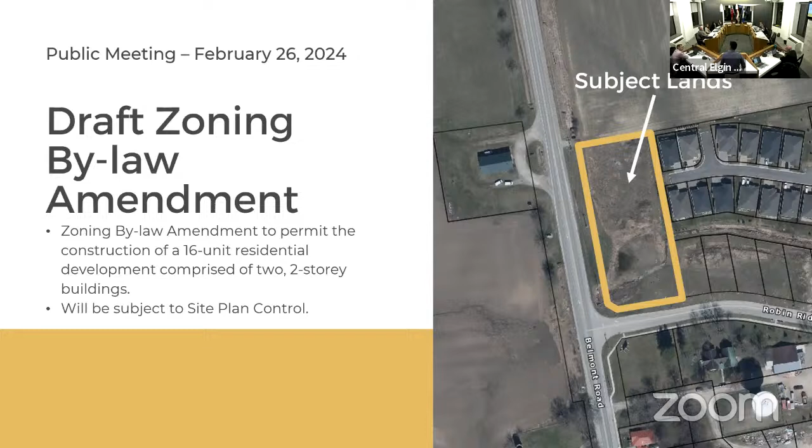And just for council's reference, the applicant and some members of the public are in attendance today to speak to or ask questions.

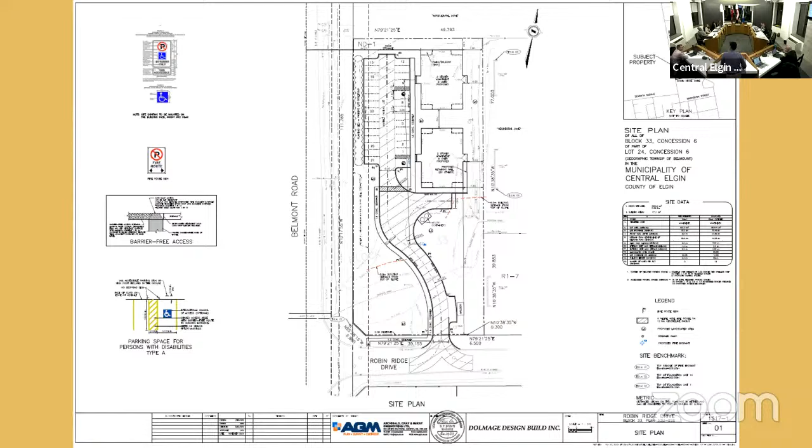So just for the purposes of people in attendance and online, the proposed amendment would be supporting this draft site plan that was submitted with the application. As you can see, a driveway and parking area coming off of Robin Ridge Drive with two-story, 8-unit residential dwellings, apartments in the northeast corner of the property. Again, this is a preliminary site plan subject to change, but it gives a general idea of what's being proposed.

The first part of the amendment itself is the repealing of bylaw 1625. Back in 2013, a zoning bylaw amendment was approved for this property to permit a church. This would repeal that and move forward with a residential zone consistent with the designation on the property.

Part two of the amendment would then introduce Schedule to the bylaw, being Schedule 1, and designate the area on that schedule in heavy solid lines as RM1-4, with that schedule being B6. As noted on the screen, that's the site-specific schedule.

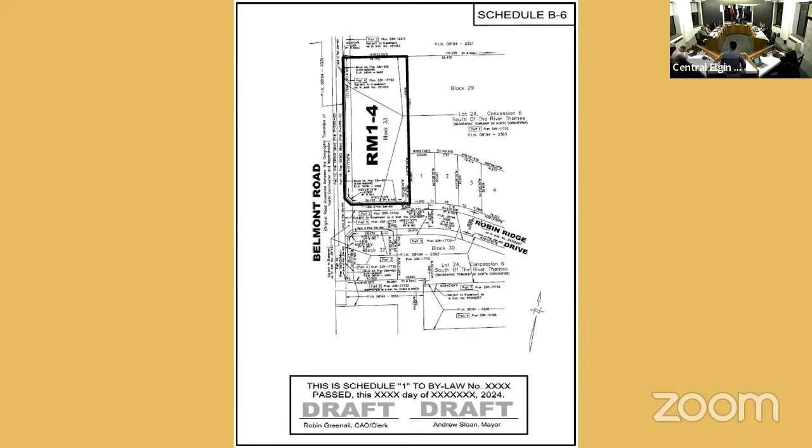The third part of the amendment would introduce a new special zone to the multiple residential section of the bylaw, outlining that the area affected by this zone is RM1-4 on Schedule B6, providing that the minimum lot area is 5,800 square meters, minimum lot frontage is 50 meters, minimum front yard setback being 55 meters, side yard setback being 6 meters from the interior side yard and 23 meters from the exterior side yard.

The County of Elgin does have a specific setback from the center line of Belmont Road, so to respect that, it's 26 meters. Maximum building height provided as 9 meters, rear yard being 4.5 meters. And when we're looking at rear yard, it's the northerly lot line, just for purposes of the amendment.

Maximum coverage being 20%. The site plan itself allows for roughly 13 to 14% coverage. The additional coverage requirement here would be to account for any amenity areas or structures that may be requested through the site plan process.

Maximum number of dwelling units being 16 per lot as per the request. Parking spaces being 20, and then exceptions to the general provisions of that zone to allow for what's being proposed through this amendment. In anticipation of eventual consolidation of the bylaw, Schedule 2 is introduced, being Schedule B, which includes all the amendments that have occurred to date, including this one, which can be seen on the screen here. Thank you.

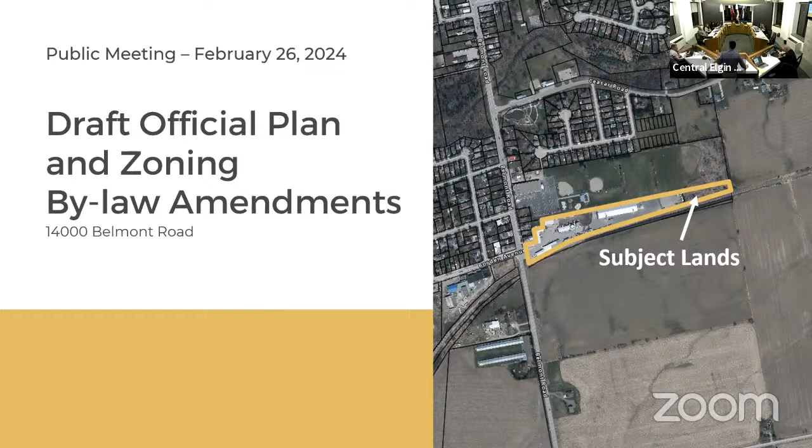On the screen, the area of the specific official plan amendment and zoning bylaw amendment is denoted where that arrow is, the back portion of the property. The purpose of the amendments is to permit the proposed construction of a 1,250 square meter warehouse for storing seed and fertilizer.

Of note, the lands used to be part of the municipality of Central Elgin, as part of their community facility for soccer fields. In 2018, the lands were divested and purchased by Belmont Farm Supply with the purpose of expanding their operations in the future.

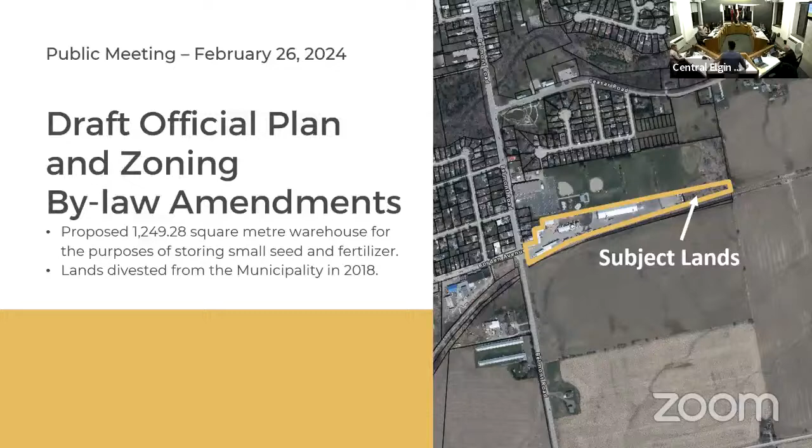This brings us to the draft official plan amendment. Since the lands used to be part of the community facility lands, and there was a woodlot on the property previously, the official plan amendment is required to change the existing community facility designation and natural heritage designation on the property to commercial industrial. This is the same designation that applies to the balance of the lands for Belmont Farm Supply to the west, so it's being consistent with what is already on the property and in the operation.

The amendment itself is purely a mapping amendment, introducing a new Schedule B, Community of Belmont Land Use Plan, and it's going to change the area shown in heavy solid lines from community facility and natural heritage to commercial industrial.

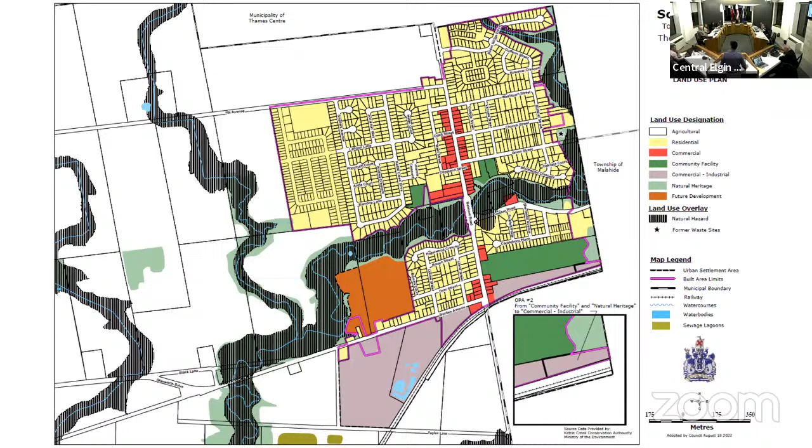As part of that amendment, the location plan again shows, it's hard to see here, but that back portion identified as the area of the amendment. Then there's an introduction of a new schedule to the official plan, again showing that change from community facility and natural heritage to commercial industrial.

Then to further facilitate the development, the property needs to be rezoned. Right now it's a combination of a park designation and natural heritage zone. The rezoning would create a new site-specific industrial M1 zone, which would be the same as the M1 zone that applies to the west of the property, applied for when they did that previous expansion, the large white building you can see on the screen right now.

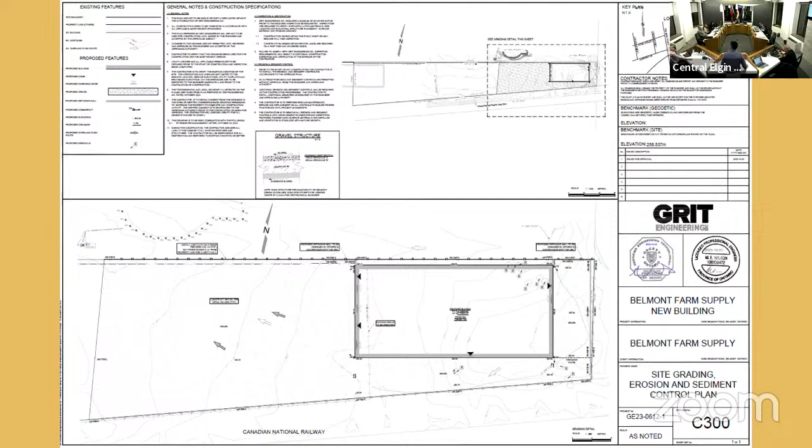As part of that, you can see the area on the map, the rectangular portion of the property is the area that was brought in through the purchase of the divested property from the municipality. That back portion is where the building itself would be located.

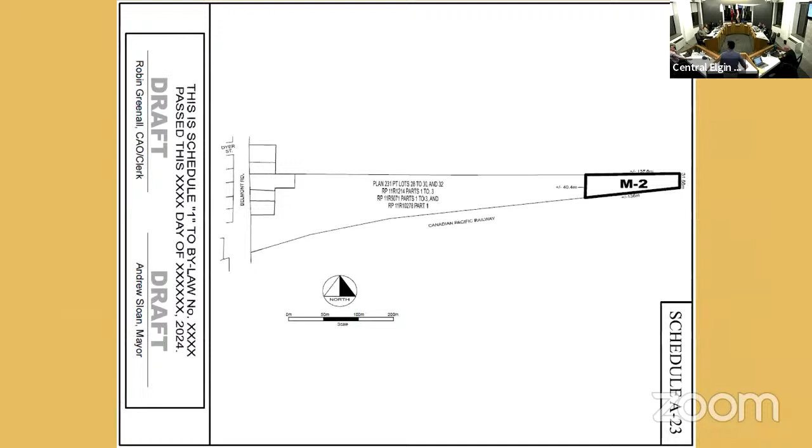Part one of the amendment introduces a new Schedule 1 to the bylaw, designating the area in heavy solid lines as M2, which can be seen on the screen. The second part introduces a new subsection to the commercial industrial section of the zone, being 7.2.6.2, identifying the area affected as M2, shown on Schedule A-23, and providing that the minimum side yard setback on the north side of the property is 1.5 meters.

And then, as we do, we're introducing a Schedule 2 to the bylaw, which provides a consolidated version of the bylaw that includes all amendments to date, including this one, shown here. My cursor is right around where the change on the amendment is.

Thank you. Mr. McClure, quick question - so we made this land surplus and sold it to Belmont Farm Supply, correct? How many years ago was that? Back in 2018, so 6 years ago, and they're now having the zoning changed to make it the same as the rest of their site? That is correct. Thanks.

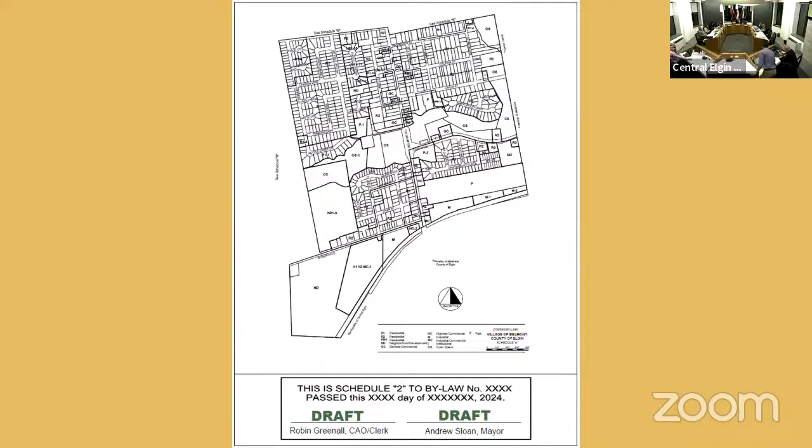Ms. Leach, have you received any written submissions on the proposal? Mr. Mayor, correspondence has been received from Carol Landon, Kevin Landon, and Linda Baker. Concerns include noise and dust pollution, lighting, and proximity to residential and recreational uses.

Thank you, Ms. Leach. Is there anyone in the gallery that wishes to speak to this? Is there anyone online that wishes to speak to it, Ms. Leach? I would ask that anyone online wishing to speak, please unmute. Thank you.

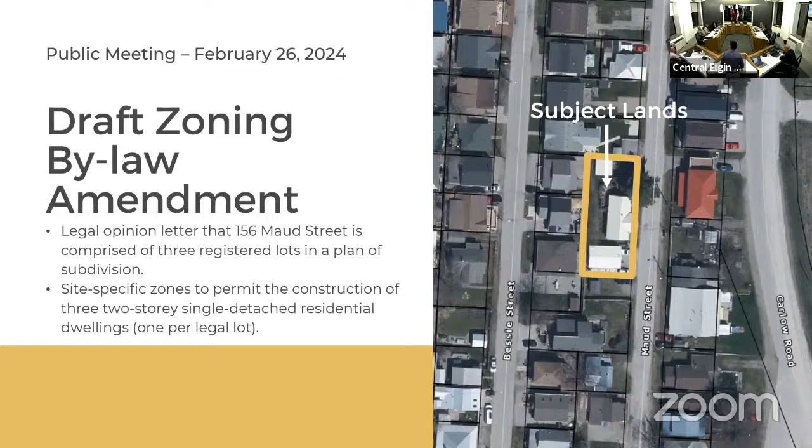So for the purposes of explaining how the amendments are proposed, the top residential dwelling is proposed to have a residential driveway on the north side of the property, with the middle lot having a driveway on the south, and the south property having a driveway on the north. I bring that to your attention, as all of the zoning regulations are more or less identical, other than one specifically that changes the north and south side yard setbacks in order to accommodate the parking on site and to reflect the geometry and location of the proposed buildings.

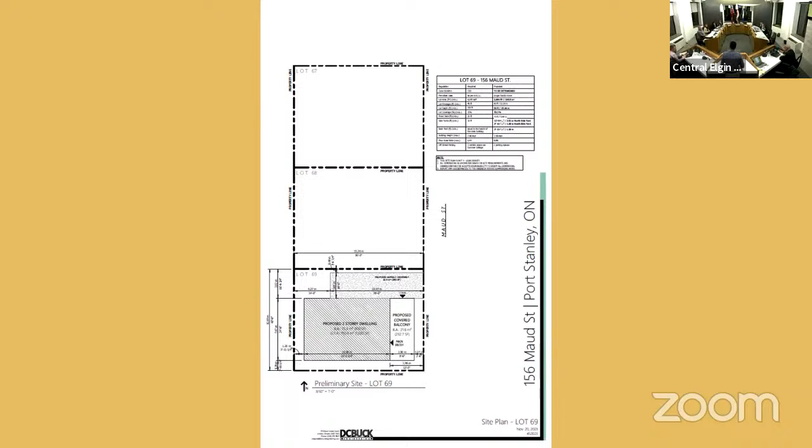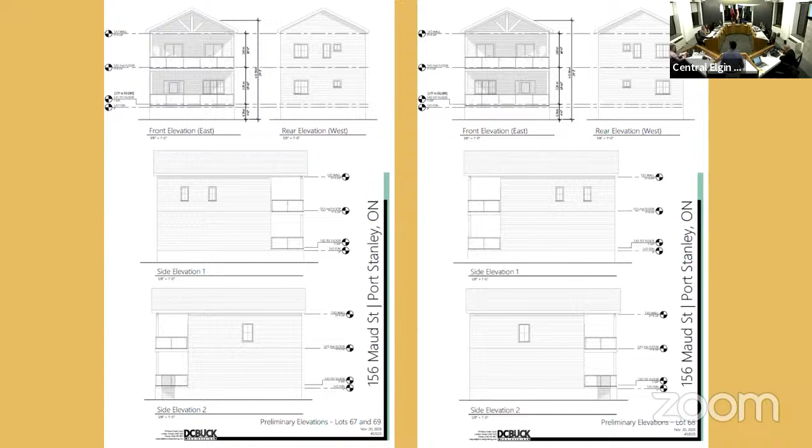And again, this is proposed at this time a plan for the buildings themselves. Again, showing that there's a front porch, an enclosed front porch at the front, which will come into the zoning amendment as well, with the main building wall pushed back from the property line.

So this brings us to the amendment itself, part one being Schedule A to the zoning bylaw and being map part 1CA. Part two of the amendment designates the area shown in heavy solid lines as R1-94. As you can see on the screen, the north and south lots are that R1-94, and there's a subsequent amendment for the center portion that will be R1-95.

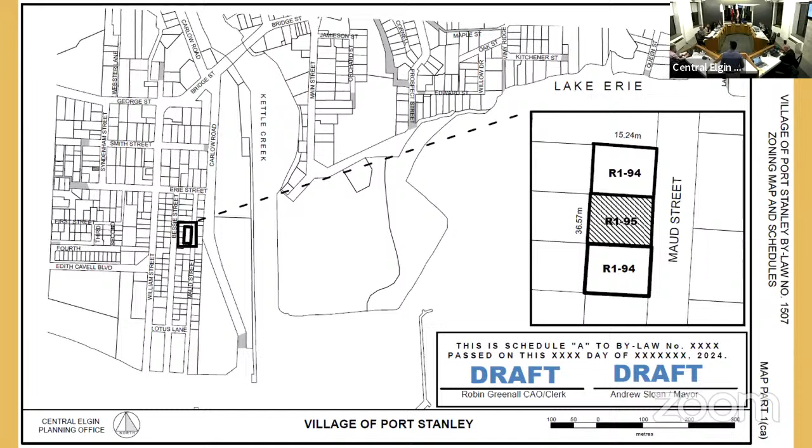This introduces a new subsection to the residential provisions of the bylaw, being that 9.2.2.94, defining that area shown in map part 1CA as R1-94, having a lot area of 185.8 square meters, lot depth 15.25, lot coverage 52.1, front yard setback of 3.96 meters to the main building wall, and then 1 meter for the unenclosed porch, again to ensure that it remains unenclosed.

So for sightline purposes for people coming in and out of the property from the driveway. Side yards, 3.52 meters on the northerly side, 1.2 meters from the southerly side, rear yard 1.2 meters, floor area ratio being 0.81, and then maximum off-street parking being 2 parking spaces.

Again, this was a major consideration through the amendment itself, given the substandard size of Maud and Bessie streets, it was to ensure that any redevelopment of the site could accommodate parking on the property itself and not further exacerbate parking concerns along Maud and Bessie. Then again, the exceptions to the zoning bylaw, given Maud and Bessie's historical nature, there's a lot of exceptions to the general provisions of the bylaw to allow what's provided.

For the amendment, again, it introduces, on the hatch lines you saw previously, that R1-95, and then introduces a new subsection after the previous one, defining that area as map part 1CA as R1-95. Again, same lot area, lot depth, lot coverage, and lot frontage, again ensuring that it's the main building wall that's set back, and then the unenclosed porch can be 1 meter from the front property line.

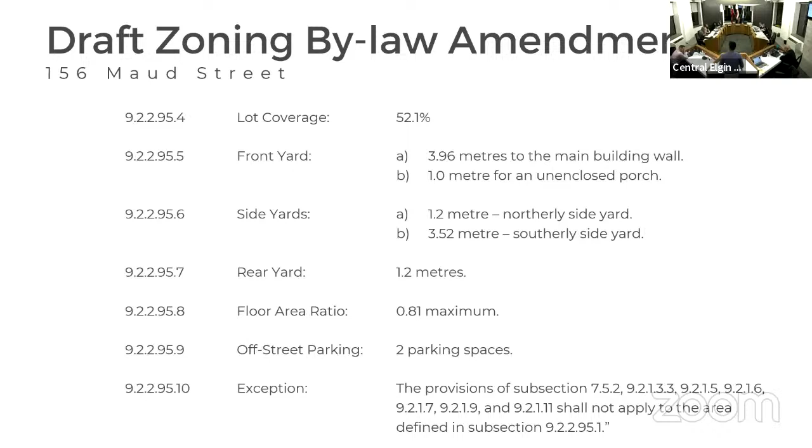And then part 6 of the amendment being Schedule B, which introduces map part 1, which includes all of the changes that have occurred to that map part to date, including this amendment, as we've seen on the screen here.

Thank you. Quick question, Mr. McClure, these houses are separate? Yes, there can be 3 separate 2-story dwellings.

That's not a lot size that we would support creating in the future, but it's a historical context of that Maud and Bessie area. That's why we requested the legal opinion letter, to essentially provide that these are existing lots of record, because if we were going through the process to further subdivide, or if they had merged, that's not something staff would support. Because again, there are minimum requirements in the bylaw for a reason. These do not meet the minimums, but it's an existing situation, so we have to figure out a way to address that situation. Thank you.

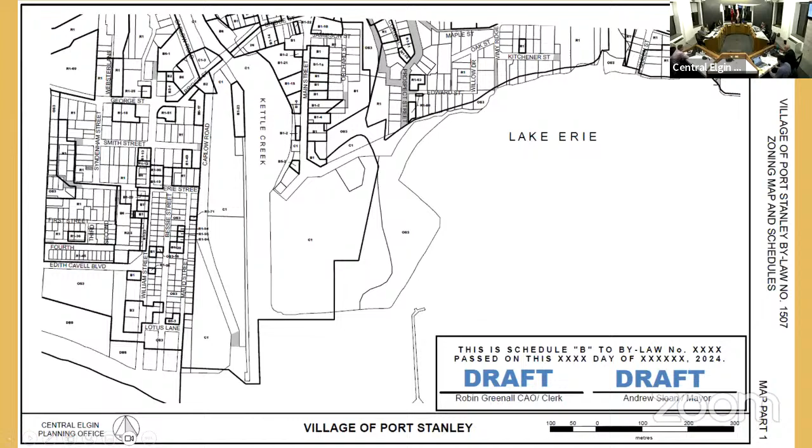Ms. Leach, have you received any written submissions on the proposal? Mr. Mayor, correspondence has been received from Janice Daw and Robert Young. Concerns were related to drainage.

Do I have anyone online that wishes to speak to this file? Ms. Leach, please. Mr. Mayor, there are no virtual attendees. Is there anyone in the chamber that wishes to speak to this?

Is there someone there, Mr. McClure? I'll just hold for a minute. Council, have any questions while we're waiting?

Mr. Mayor, I believe Ian McGuffin would like to speak to the application.

Mr. McGuffin? Yes, it's Ian and Wendy McGuffin. We own the property at 159 Bessie, which runs through to Mott Street. So we're the property immediately to the north of the proposed development.

I'm not sure that I would say I have concerns. I have questions, and tell me if it's not appropriate to raise them. I guess the big one is we're wondering what plans the owners have for these 3 dwellings once they're constructed. Are they proposing to sell all 3? Are they proposing to live in one and rent out the other 2? Are they planning to rent out all 3 as Airbnb?